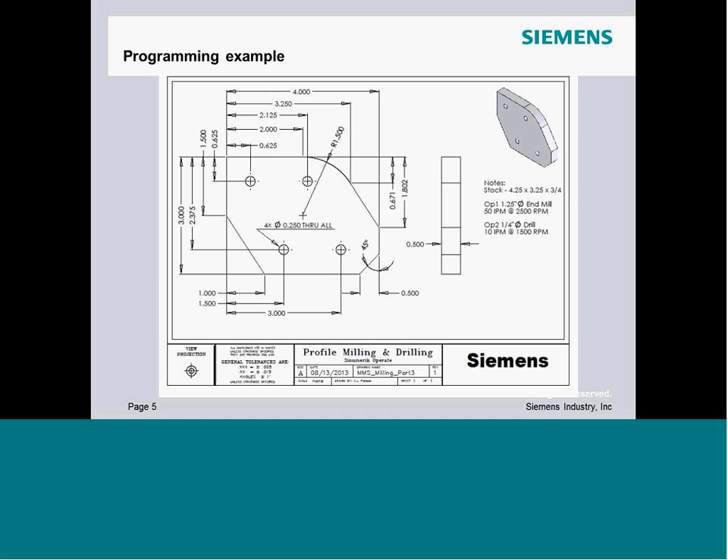We're going to face off the top of this part. We will machine this irregular OD profile, and we will drill some holes in the profile. Just giving you a basic overview of the operations it would take to create a pretty standard part program. We're going to talk about our jog mode. Quick snapshot of the first screen we're going to see, which is our primary jog screen.

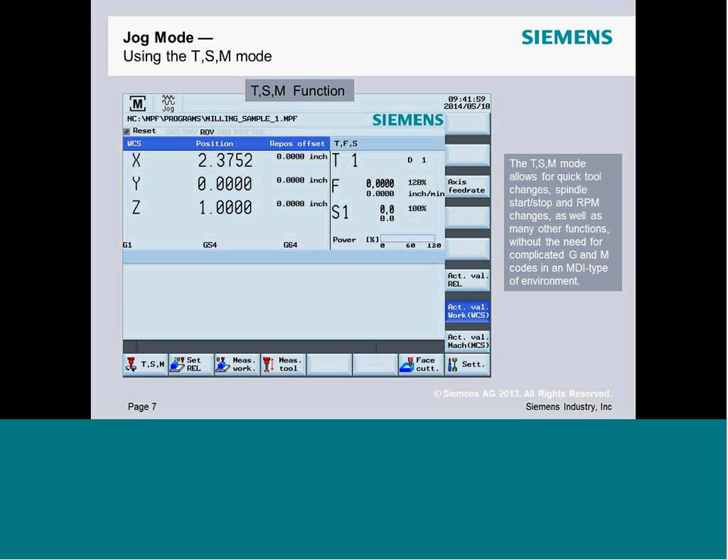We're going to talk about functions like TSM. TSM is an area where we can do tool changes, fire up the spindle, and do different M code statements. We'll step through some of the tool functions, as well as measuring part functions, some of the canned features that are built into the control. At the offset tables, what it takes to create a tool in the system, the tools that we support, and maybe some of the unique things within that table.

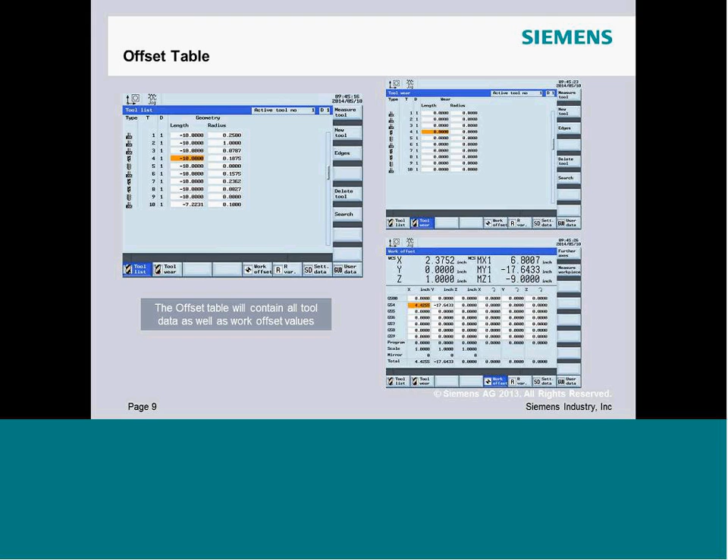What we're going to do is transition that content into a live demonstration. So at this point, I'm going to fire up our offline programming tool we call 808D on PC. 808 on PC should be loading on everybody's screens right now. 808 on PC is an offline programming tool.

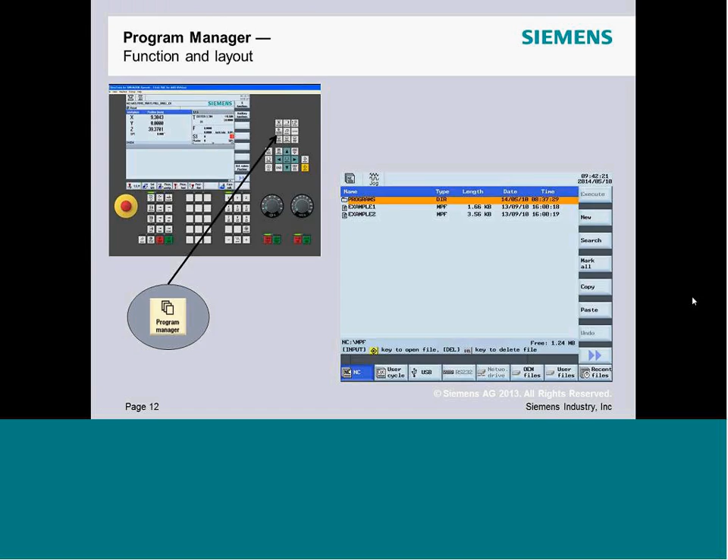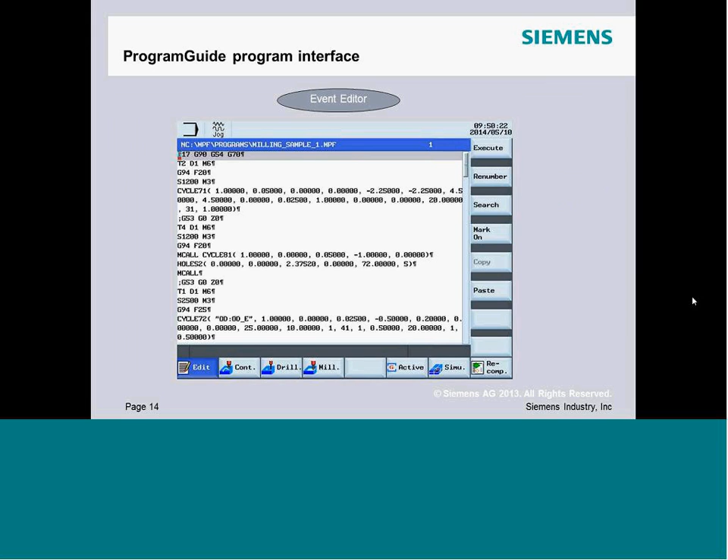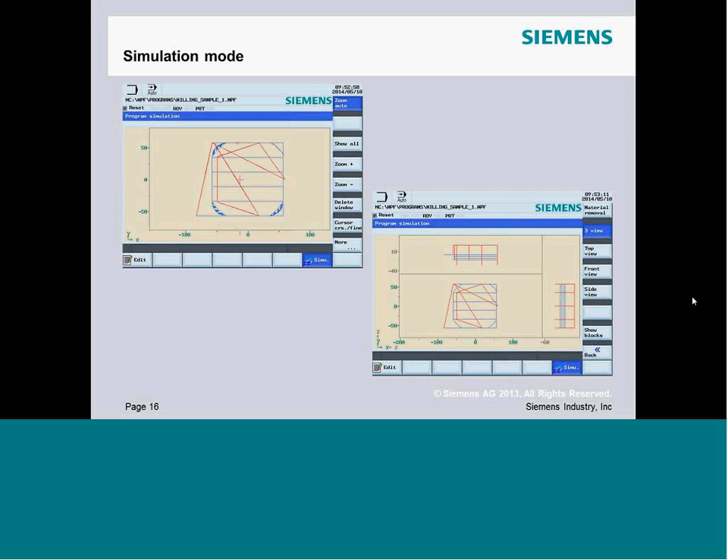Once we create a new file or a new directory, we'll show you what the editor looks like, show you the canned cycles, and we're going to do contours, we'll do some drilling routines, maybe a facing cycle. We'll get a chance to play around with the simulation mode within the control, and go to our live demonstration portion.

What I do want to do is I want to kind of refresh your memory on the print. Let me bring it up real fast. So this is the part we are going to be working on. Basically what we have here is we have a 0 location. We'll treat it to be the upper left-hand corner of the part.

We're going to roll around the shape. We'll face off the top of it. We're going to face it off with a 2-inch face mill or end mill. We're going to profile it out with, let's say, a 1/2-inch end mill, and then we're going to drill that 4-hole pattern with a 1/4-inch drill.

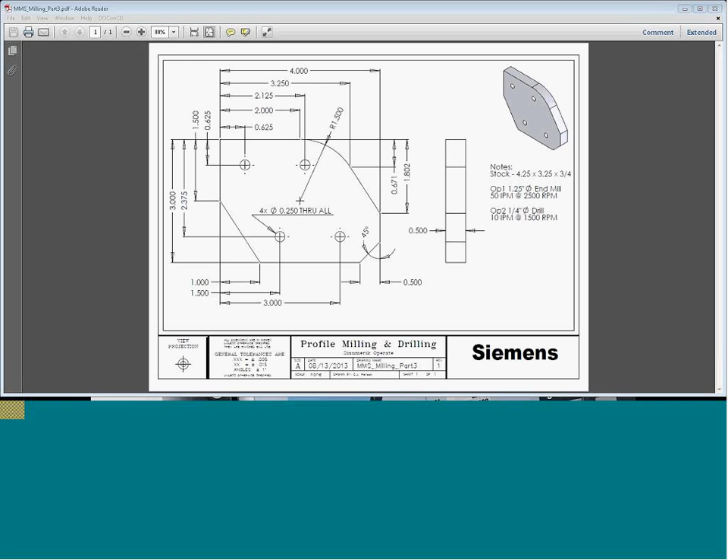Okay, so let's switch back over to the screen. There we go. We should be seeing our SinuTrain, and we're going to initiate creating a new part program. What we're going to do here is we have to get to the part program area by selecting Program Manager.

The 6 navigation buttons we were talking about earlier. And we just select Program Manager. It's got the 4 kind of boxes that are representing like files. Select Program Manager. It's going to put us over to the Program Manager area. I have options I can do here.

First, I can handle programming in alternate areas. It comes standard with a USB port. I can access the USB by selecting the USB function. It would show me whatever's on my USB stick. RS-232 is also standard on this control, so I can communicate via RS-232.

User files is actually an area on my hard drive where I could have part programs. You set this up maybe to be a network path, depending on if you have an advanced system or not. In the advanced system, we do support networking capabilities. Or within NC, which is our system memory. This is where you're going to create most of your standard part programs or bring them in for operation.

I can put part programs right here in the base directory or in folders. So in this case, I created a folder called Programs. Maybe I need to do a folder, so I can select New, and then Directory or File. Create a directory called, I'll call it Sample, for the programming we're doing today. Type in the name, select OK.

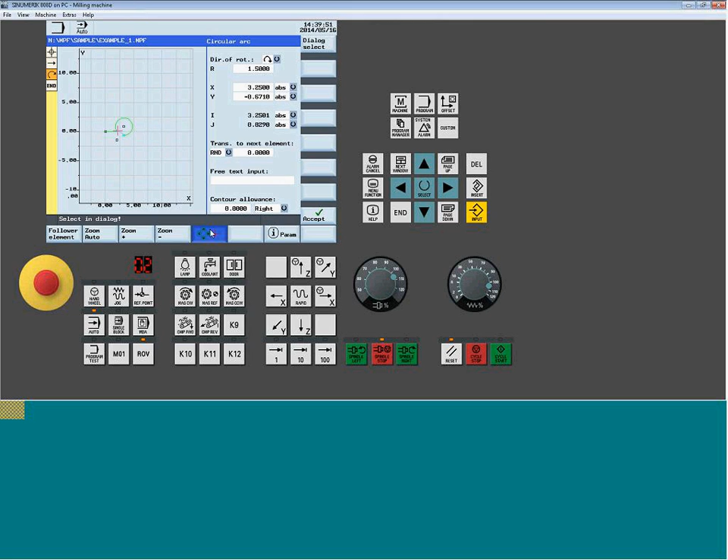Now, what it automatically did, and I'm going to zoom in so you can see it. In a second here, we'll zoom it in so everybody can see it. A little hard to see, but what the system just did was it's now calculating the potential of 2 arcs. I know that because I have this dialog select question on my screen. So the dialog select which of the 2 potential scenarios, and you see how the center point changes as I toggle them. Pick the one you want and hit select.

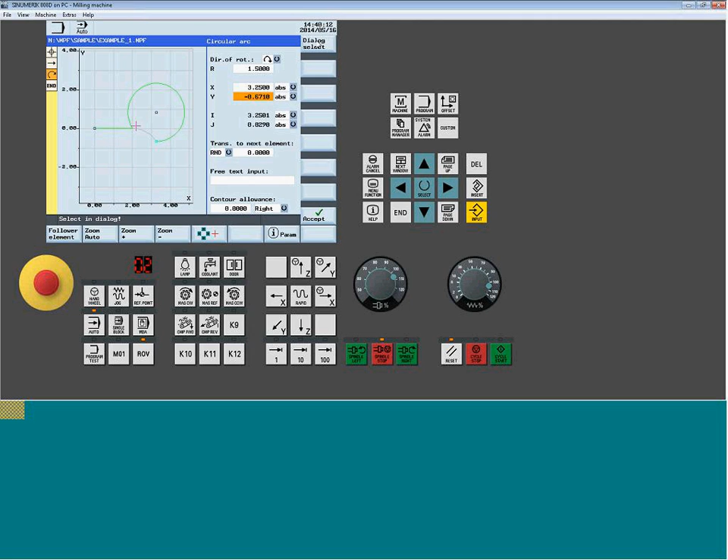If you pick the wrong one, you just hit the change selection key. It'll go to the 2 scenarios, and I could pick the other one. Very common when creating arcs, you have 2 potential scenarios because you have 2 different center points that could have been calculated with the same endpoint radius. I filled out the page. I don't have any transitions to the next elements or end-of-line radiuses or chamfers in this case, so I'm just going to accept the element.

I'm going to do a 2-axis move with my X button. Now, I'm going to keep this simple. I'm going to tell it that I'm coming over to an X of 4 and a Y of negative 1.82. Accept it. Come straight down in Y with the vertical button. I'm down to a 3 position, which is negative. There, I want to chamfer, so I'm going to change my round to a chamfer statement. There's my chamfer command, or type in a chamfer of a 1/2 inch. Accept it.

The chamfer doesn't come up until I create an element. So in this drawing, I happen to be moving back to a positive 1 inch. Now I see my chamfer came up, and my move came back. You can play around with the zoom and stuff to kind of get a good idea of what you're seeing. The 2-axis move, we're going back to a position of X0 and a Y of minus 1.5. I'm going back to my starting position, which in this job I happen to be.

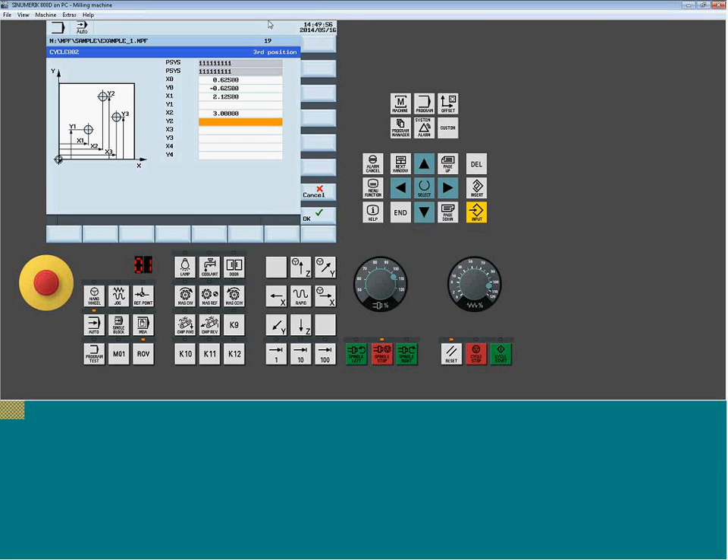So I'm going to tell it it's 5/8 over in X and minus 5/8 down in Y. My next hole happens to be 2.125 over. I am at my Y, so I do not have to put it. I'm going to now position over in my X and down in my Y both at the same time. So I'm moving over to an X of 3, but I'm dropping down to that one lower right-hand hole. Going to be 2.75. I want to go back to my fourth hole. That's going to be at a position of 1.5.

So now I have my MCALL statement, my pins, and now I end it. I show my drilling. We're all familiar with a G80 type of statement. In our world, we do another MCALL. But in the 808, under drilling, I have a deselect modal function. What it'll do is automatically insert an end of drilling cycle called MCALL. So between our modal call, that's what MCALL stands for, modal call, is what's going to drill.

Okay. Well, I'm done. So maybe I can shut my spindle off. I'm going to shut my coolant off. A simple statement in our world for doing a retract position, telling it to come up and away, is what we call a SUPA statement, S-U-P-A. SUPA is a temporary suspension of the active work coordinate. So basically shutting off G54, but it's a non-modal statement for only the length of this instruction.

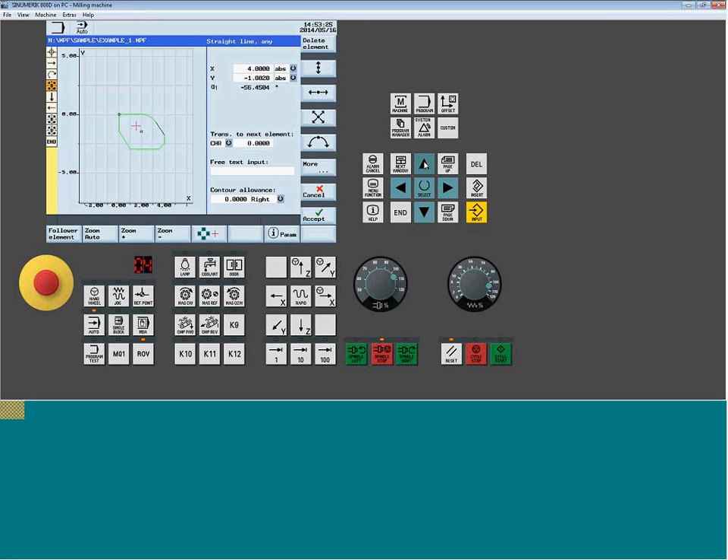See, on my downstroke, I want to change the chamfer size. I can come over by selecting the blue arrow to the right, over to the chamfer, and make whatever change I want. I simply hit accept element, accept one final time, and it updated the cycle. So I don't ever actually have to worry about this kind of gibberish down here. It's tracking what the cycle is inside the contour editor. I mean, the points make sense. Here's all the lines and positions, that stuff. It kind of propagates the graphical editor.

What we'll do real quick, we are running a little short on time. So let's just jump over to auto mode, and then I kind of want to open up the floor for any questions that may have arisen or questions you guys might have on other topics.

So if it was time for me to actually run this part program, since I'm still in the auto mode from simulation, I can simply hit the machine button. Machine will switch me to whatever mode I'm in. So with the machine button, I'm going to go back to jog, ref point, hand wheel, block, or auto. Back to auto mode. I hit it. Machine puts me into auto. Now I'm in auto. From here, I can hit cycle start, and the machine would start cutting my part based on the feeds and speeds I have.

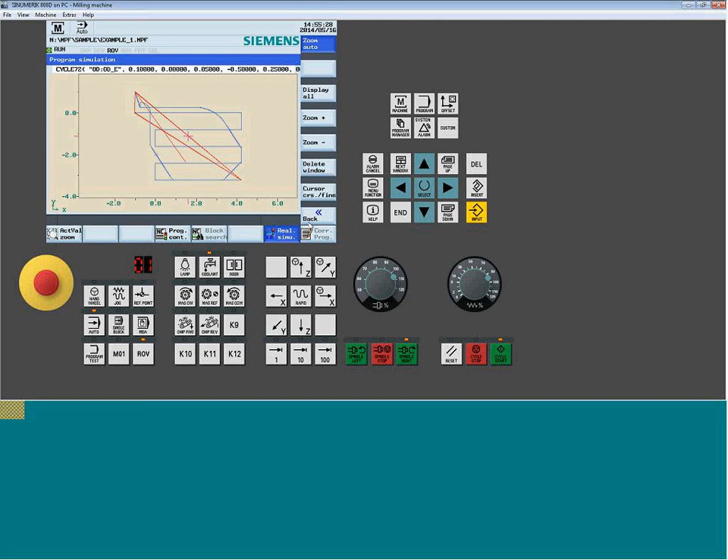Probably the only other thing I'd want to show you guys from an auto side is how do I start in the middle of a program, and that is using the block search function. So when I select block search, it goes back to what looks like my program editor. Move your highlight up or down to wherever you want to start. So I'm going to start at tool 4. It will modally scan to this point, so I can theoretically start at 8 and it would still catch the tool 4 and change to tool 4.

So once I've decided the point I want to start, I want it to automatically scan to that point. I need either to contour or to end point. The difference in the two, and you can read up a little more when you get a chance, is really: do I want to start right at the position I'm telling it, or do I want to kind of lead into the position? Here it really makes no difference. So I'll just say to endpoint.

It pre-links that position, scans to it, and it's now waiting for a cycle start. So I'll bring up my real-time simulation just so you get some kind of acknowledgement of what it did. I'm going to select cycle start once. You get a second question: you sure you want to start in the middle of the program? I say yes again. Does my 4 holes. And we can zoom this. I just deleted one more. You guys should get the overall gist of it.

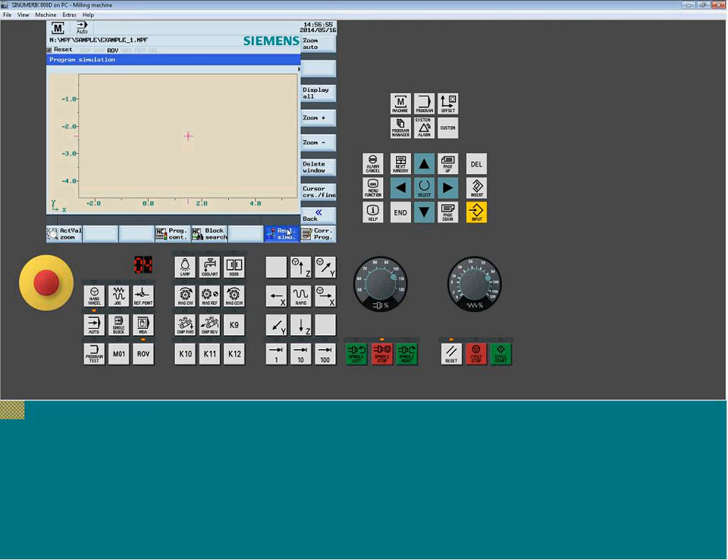You can also control different things you're doing within the program under your program control button. Tasks would be running without the servos physically moving, just kind of parses through the program. You can run feed here. You can do different stop statements, block skips, how the single block function works. There's a whole bunch of different functions within here. We can certainly leave that for another time.

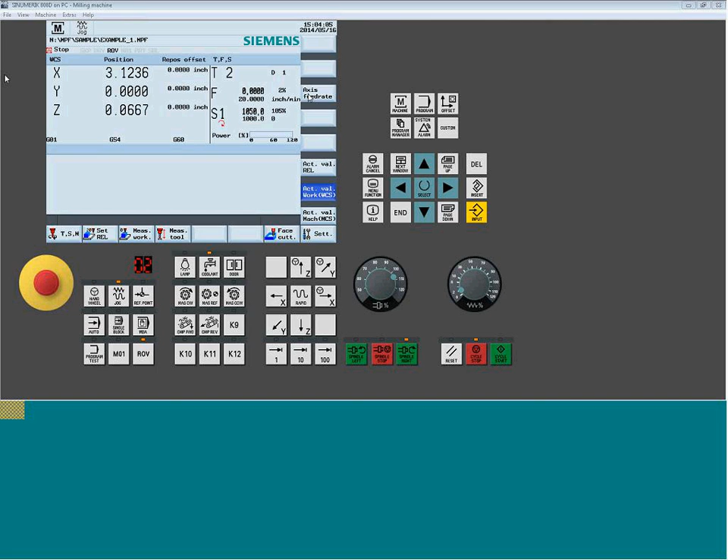So many of these canned cycles, if you're building out of a CAD/CAM system, let's say, they can run the cycle the way it looks. So even if this cycle 71 is being posted from a CAD/CAM system, you most certainly should be able to come in and open it up with the recompile function. The data mask, or the conversational field, is really just propagated by that cycle.

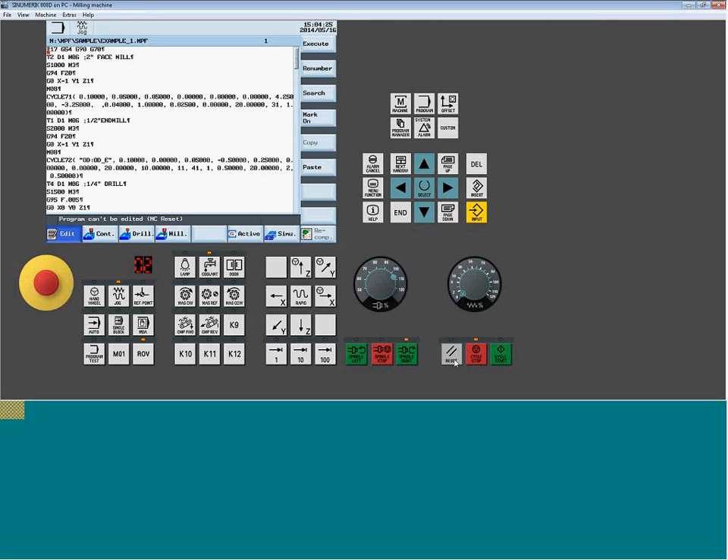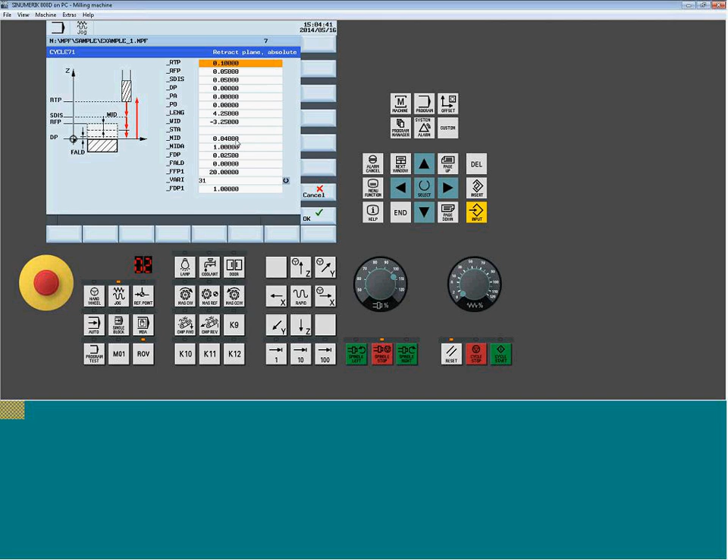So if it's being posted from an outside source, as long as they're following our protocol, they're building the cycle as it reads here, which they would need to just get the cycle to run. You should be able to open it up conversationally. So maybe that's what you were referring to. All right. Yes, it was. Great. Thank you.